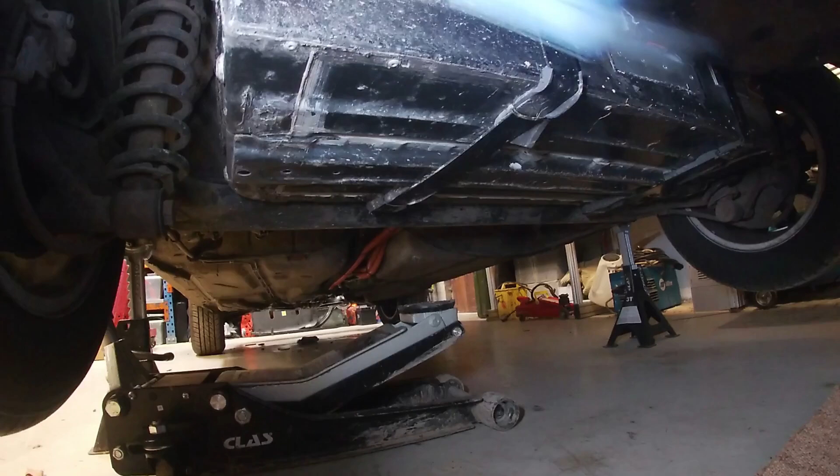Underneath, for those who didn't know, there's the pack that we had in here. This is the rear of the Nissan Leaf pack, which I chopped and utilized what was left. We sealed it all up and it's been great. It's a good sealed pack. But it's no longer fit for purpose for what we need to do. So we're gonna design a new pack which is gonna fit in the same space. And yeah, see how it works.

So hopefully I've designed it in CAD that we're going to use those 355 modules, those VDA 355s, and they're going to be sitting, I think, obviously flat on the flat height, and I'm not sure. This is where I really have to be careful space-wise what I have to play with, because I really can't go down any lower.

That's pretty much it. You see, there's the trailing arm there, and that bar sits just around it there. You don't want to go any lower than that, so that's my limit. So this rear pack's going to come out, and yep, let's go for it.

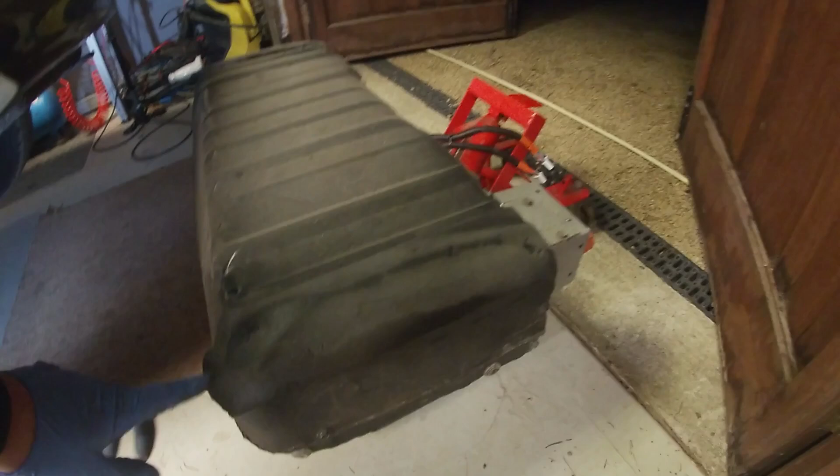So there you go. One pack out. Yep, it's lived very happily in there for the last couple of years. Could have done with slightly denser foam there, but it's fine.

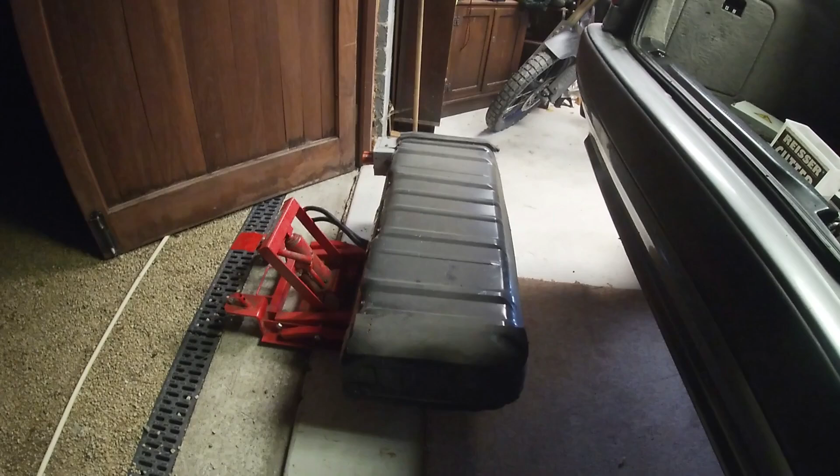But what we're going to do is take the overall rough measurements of this, and see how this stacks up with our next plan. Will the modules that we want fit into the same volumetric space? I need 10 to fit in here. That might be a little bit of a challenge, but that's what we're here for, these little challenges. So that's it.

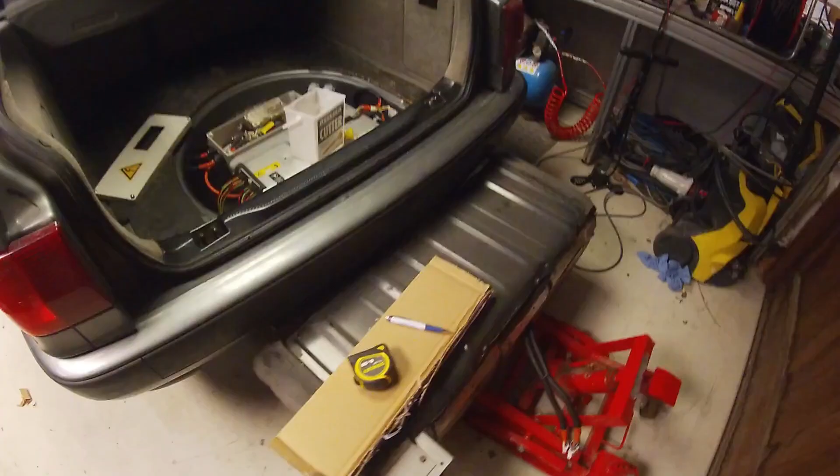Measurements taken, scribbles made. You know, we could go 21st century on this and 3D scan it. Stay tuned, might do that. But for now I'm going all prehistoric on it, and I'm going to sketch, well, it's part prehistoric. So I've got the rough sketches of it done in CAD. And then with this, let's just see what size the box needs to be.

So we'll see. In the meantime, the coupler's being made down the road. Well, the coupler at the other end is being adapted to fit, so we should have a bit more of that. And then slowly piecing things together. Battery's the big thing. First of all, make sure we get the right ones, they're all going to fit. We'll go from there. So let's move things along.

A few weeks later now, 3 weeks later. Been very busy. Place is cleaned up a bit. I'm kind of packing. Other side of my life. So, what have I done in 3 weeks? Not a lot. Been waiting for a piece of the puzzle to be finished.

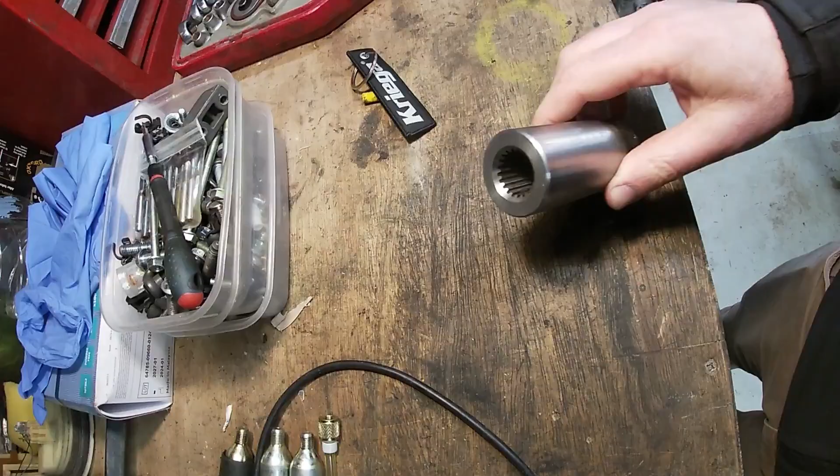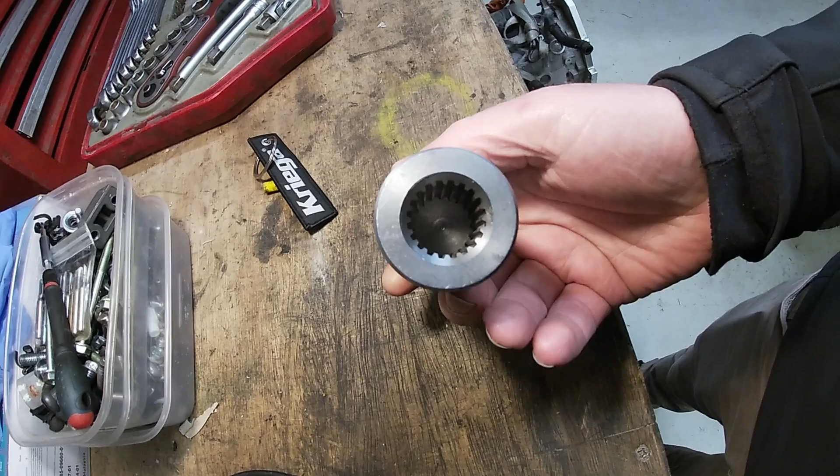And voila. We had that. That is our Leaf side. And now we have our Audi side. Lovely. Pretty. So we've got a spud in the middle of it there to stop it wandering back and forth. That's what it was doing before. It was going, woo, where are we going? Let's offer it up and see how it looks. It's good. Beautiful. Just enough engagement there.

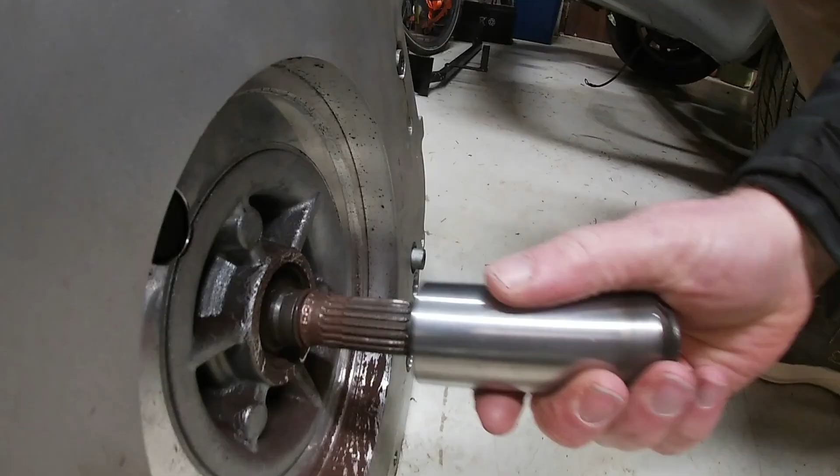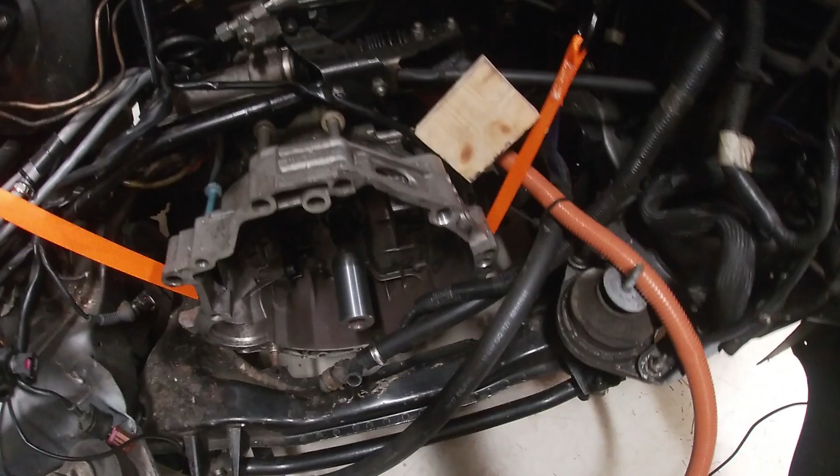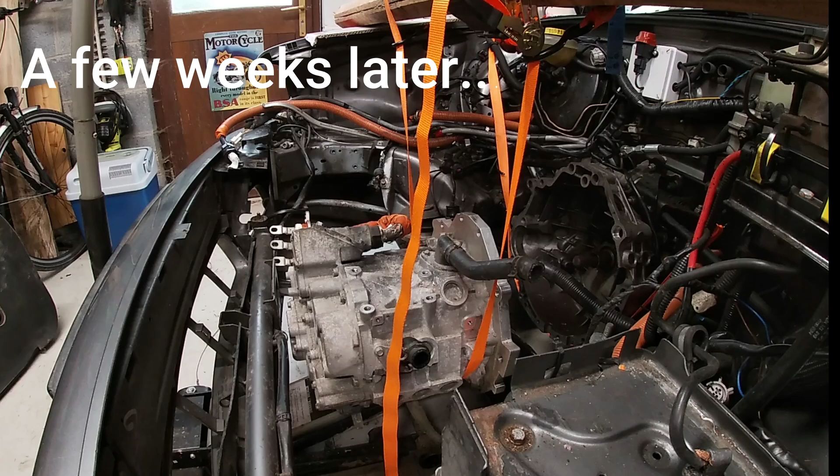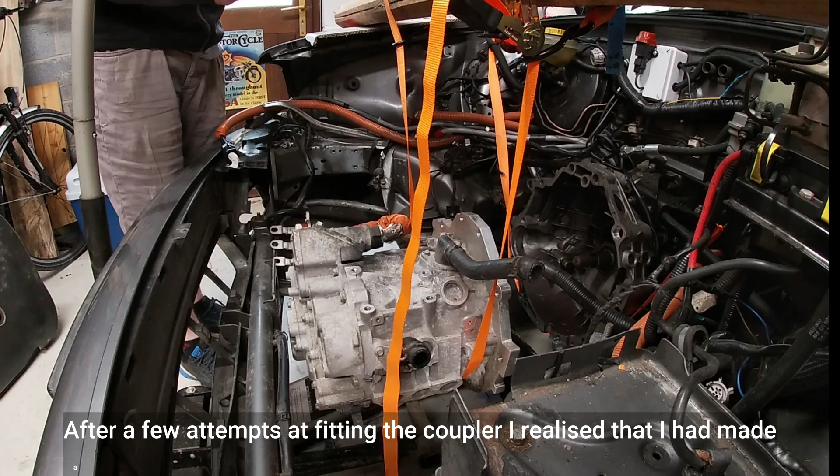Huh? On this side. There. So what I'm going to do is a bit of measurement to see how that matches up with that. Make sure everything's happy. Okay. Little coupler. What's going to be easier? I reckon probably putting it on the other side.

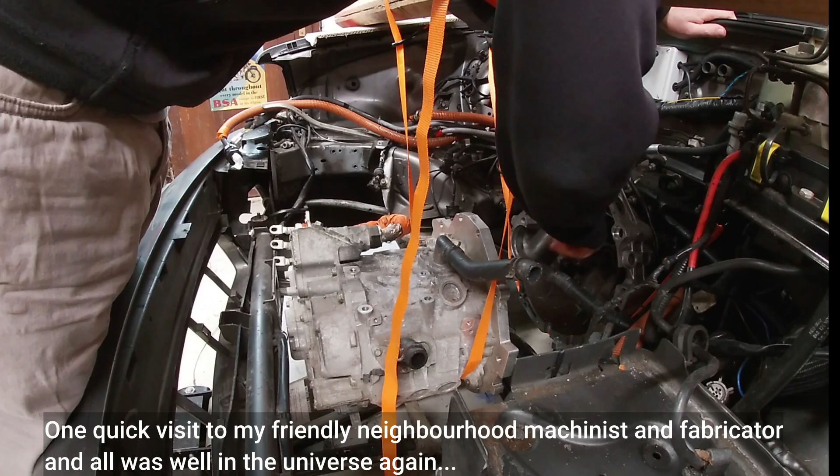There you go. Little bit of a tap. Rubber mallet. Lovely. Like a glove. See? Let's jack her up.

Okay, we're just lining up to the shaft now. See, we're just getting lined up now. So that's it in place. Now, what I think is, oh, go away, B. Oh yeah, it's just almost there.

What we might have is like a slight mismatch where they just might not be matching up, but it's going to be a little bit of either metal off either end, basically gearbox, spline end, or the motor side. So this is it. It was a first test fit to see how it works. A little bit, probably about 10 mil somewhere, just needs to be relieved. So we'll do that in a bit.

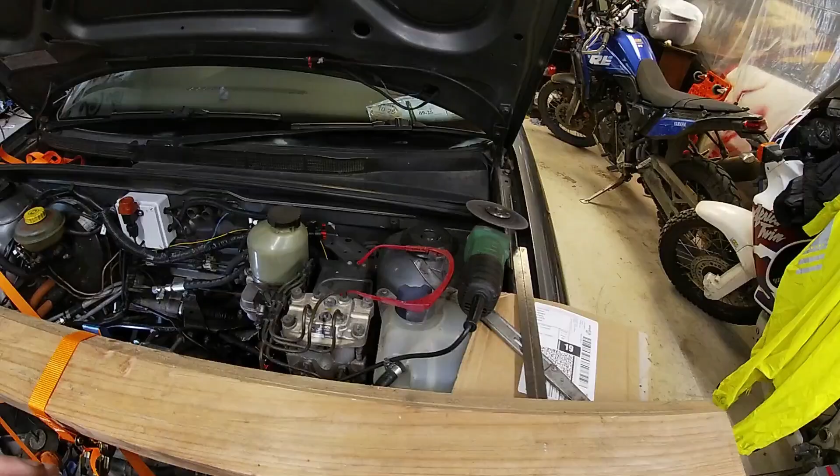Okay, a little bit of a snip with this off the end of the gearbox. Input, output, input shafts. These now, it is absolutely perfect position. Mate up with this. Oh yeah, there's a little bit of it left.

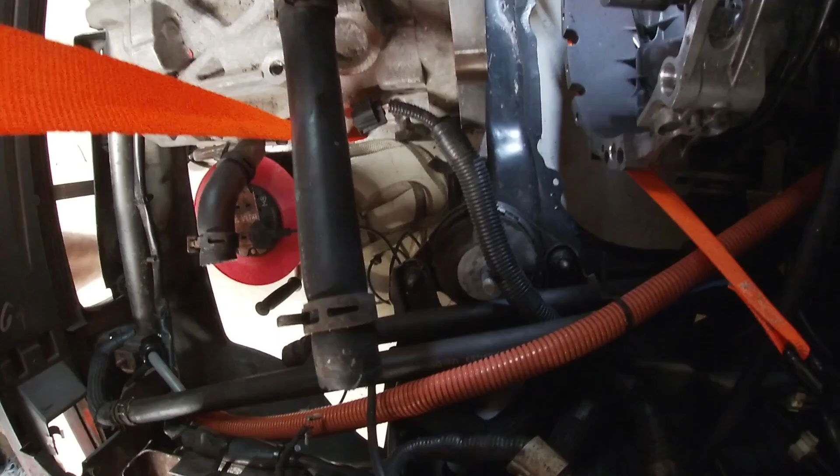How you do this? Come on, come. I don't want you staying there. Hello. Bye bye. Out you go.

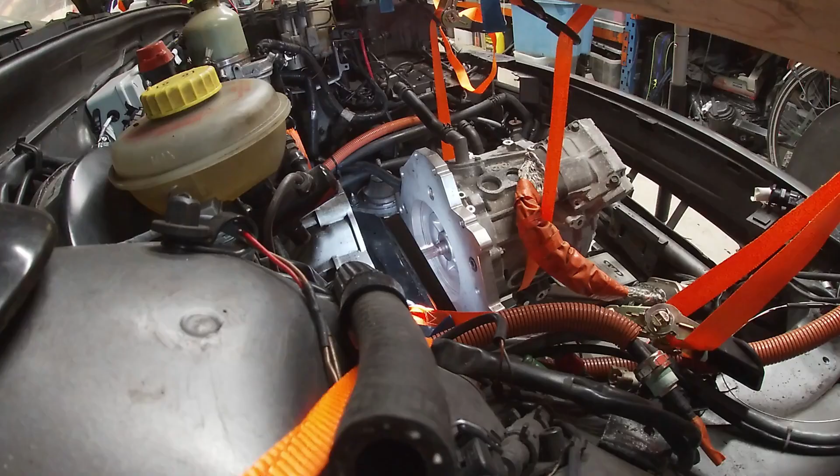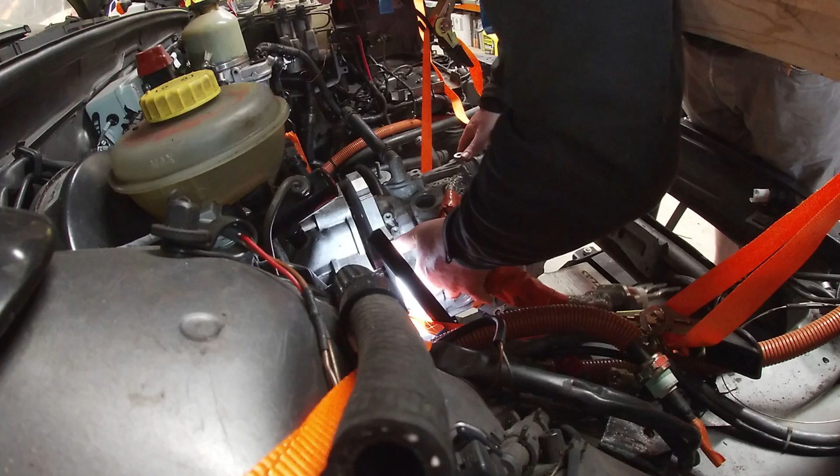So, grinding gear. Let's put them together again and see what happens. Take two. Take the strain. So, should go together a bit easier this time, I would think. Okay, that's that. Look at that.

Yeah, so I think all it was, there's a dowel that's on the gearbox housing, and it just wasn't aligned with the adapter plate. So took it out, put it back in, snug. Did a test measurement as well, and I've got 2 to 3 mil play on the coupler. It's perfect. So I can just sit there between the two, and it'll all be rosy.

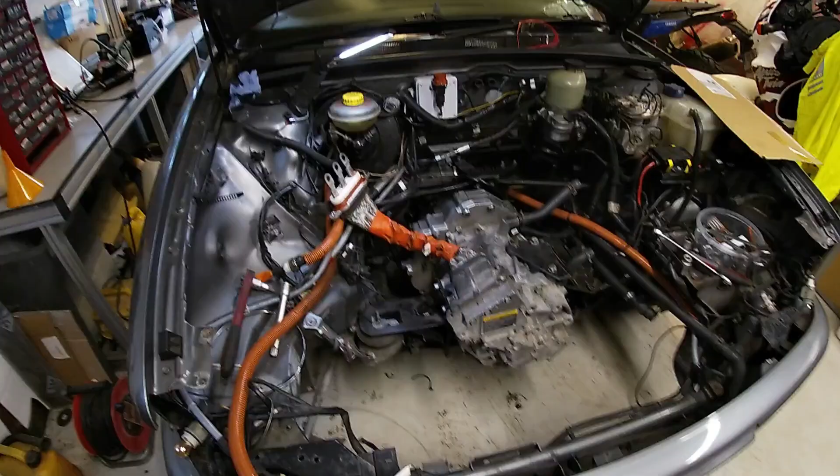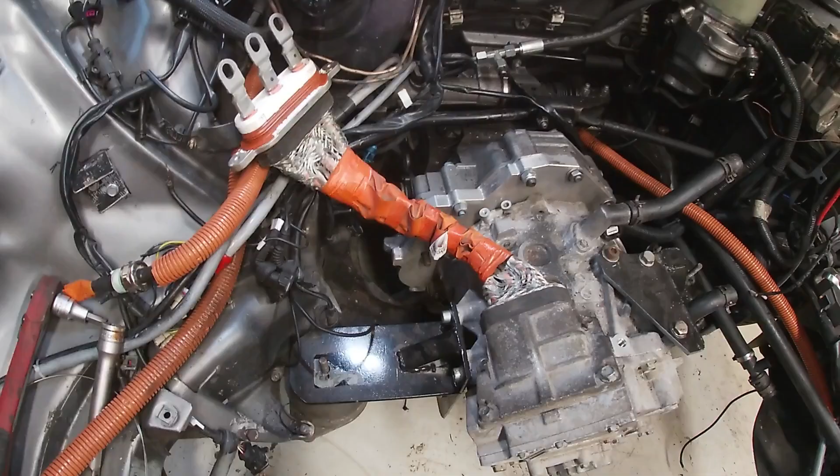So I'm going to get this buttoned up and get some motor mounts on, and yeah, we'll be good. Okay, that's it. Bosh. Motor mounts in. I just need to do a couple more bolts around the bottom, but it's all snug. Next up is to plonk the inverter there-ish, but basically when I get that box and see if it fits. But that's for another day.

Enough messing for today. Let's leave it at that and pick it up at the next one, where I might have some 3D modeling of what I think is going to fit in the box. So yeah, more on that next time.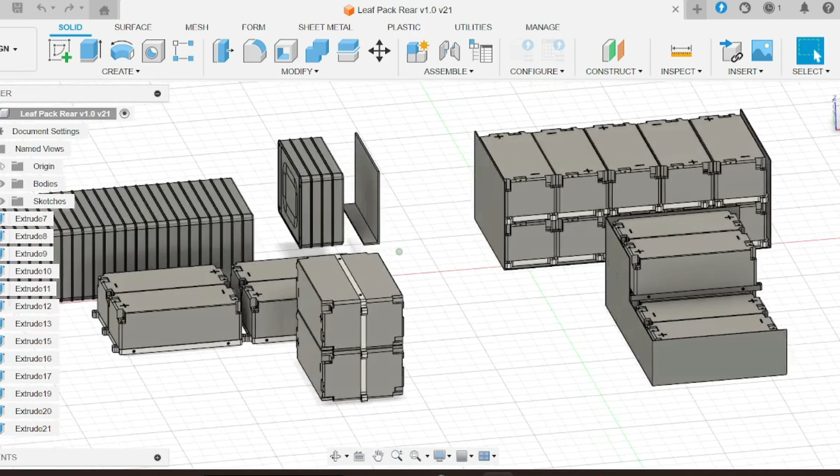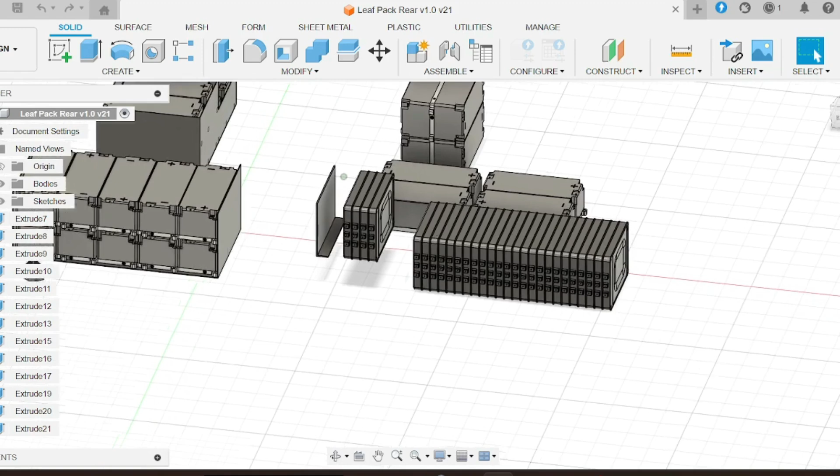So this is me messing around with what I can in Fusion 360. Actually, let's zoom out. So you see over there, that's the full Leaf pack, laid out as it would be in the back of the Leaf, where I have the fuel tank. So they are, oh, come on, there you go. Yeah, they're all laid out. That's 24 to 48 laid out. So it's kind of like, right, there's my envelope, the space I'm going to need to fill.

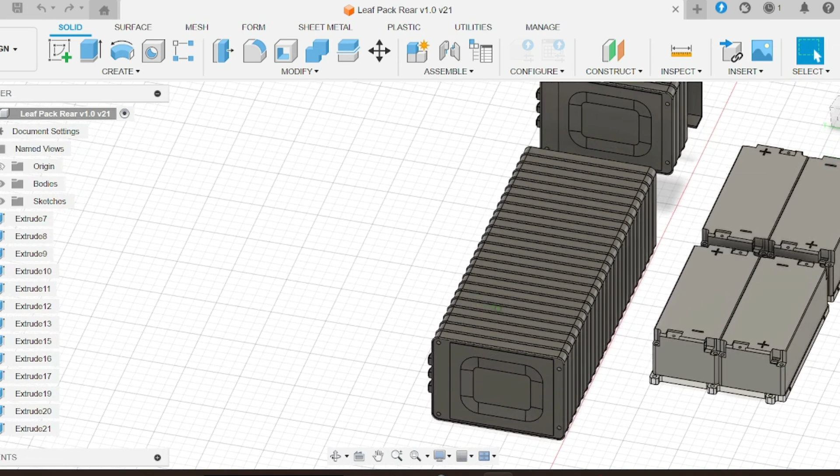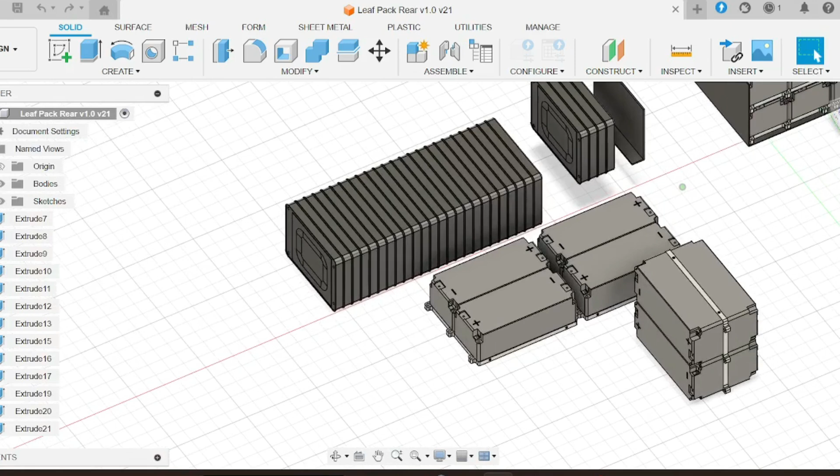So I looked at these VDA 355s. These are the ones that are used more in the likes of the Peugeot e-208 and any of the Stellantis kind of stuff. All of these come with their own cooling plates, and all the CAD is readily available. You can actually get all these from the pack as well. The packs out of the e-208 are pretty reasonably priced at the moment, and you can get a lot of the hardware that you need, and chop and change.

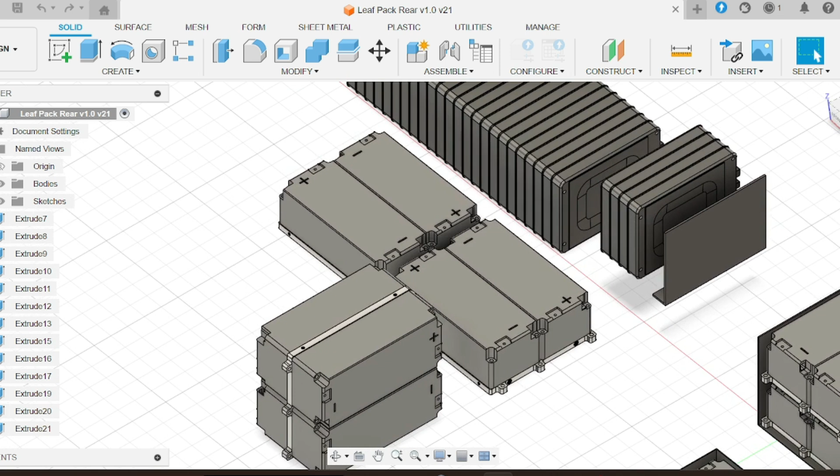So I'd been messing around with lots of ideas of how to package these up, how they're going to fit in the back, especially first of all the petrol tank area. So using 6S2P modules, magic number 18. That'll give us our 400 volt nominal voltage that we need. So with that, started playing around.

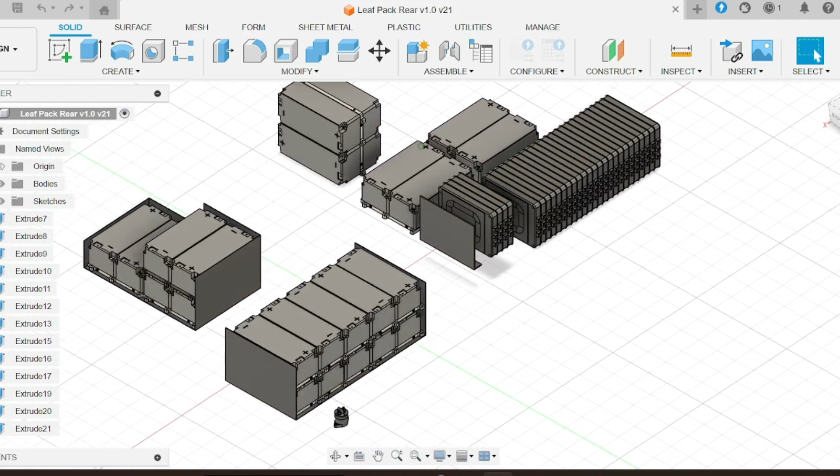And if you look here, I took some measurements underneath the vehicle where the petrol tank sits. Sorry, I'm getting used to the SpaceMouse. There we go. This is the arrangement I've kind of come to. You got 2, 4, 6, 8, 10 there.

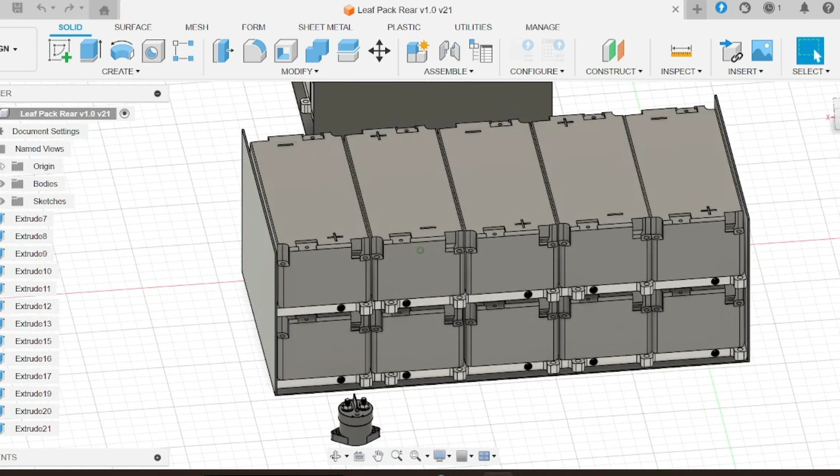And if you can imagine this, I'm looking at the back of the vehicle at the moment. So you're looking at the pack as it sits in the fuel tank area, and around this area here, back here is where the spare wheel well would be.

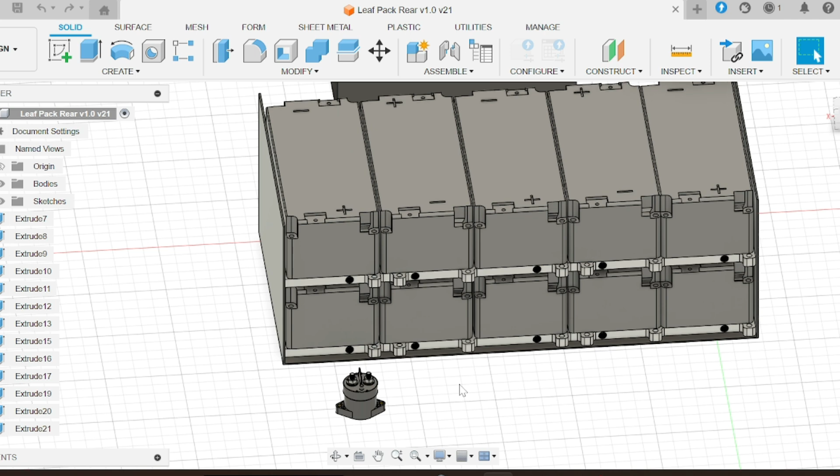And so with the spare wheel well being circular, it leaves a lot of space back on these edges at back here. So on the pack I have inside, I have the HV connector over this side feeding back into that small little high voltage junction box in the boot. But with this, I'm going to be able to extend the pack out and around these corners, these two corners, and put in the contactors, whatever I need back there to isolate these packs, and whatever else I need to put in there, any BMS hardware and stuff.

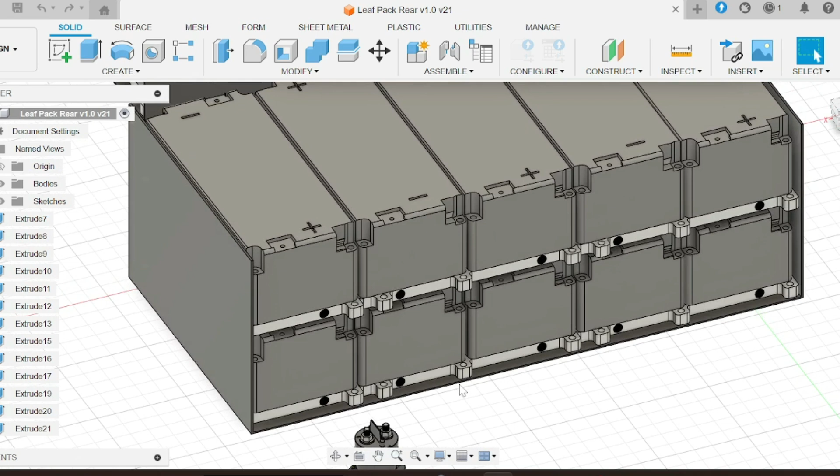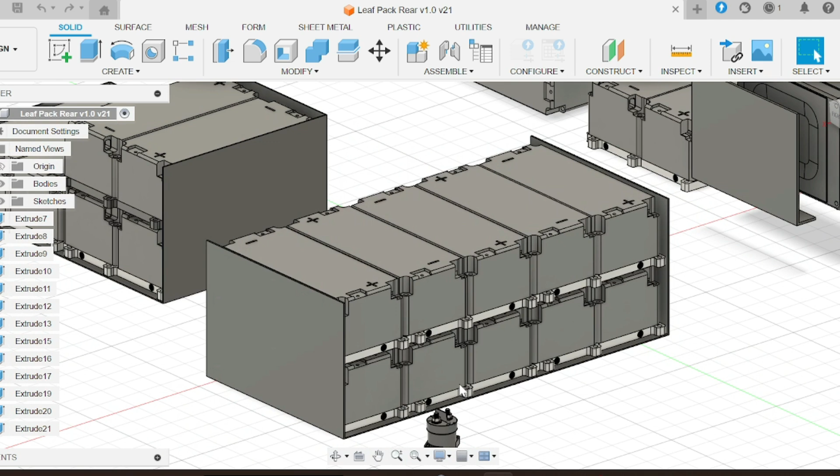So this is just a start to see what I can put in here. So that is that, again, a bit rudimentary, but it's straightforward and it fits with plenty of room. When I say plenty of room, like 30-40 mil here and there, it just about has the headroom. The last pack sat just above the trailing arm of the vehicle. This does the same. So yeah, that's all good.

But if we carry on down here, the big thing is how are we going to fit the batteries at the front? So, come on, Space Mouse. Oh, this is so funny. Come on, you want to go left or right?

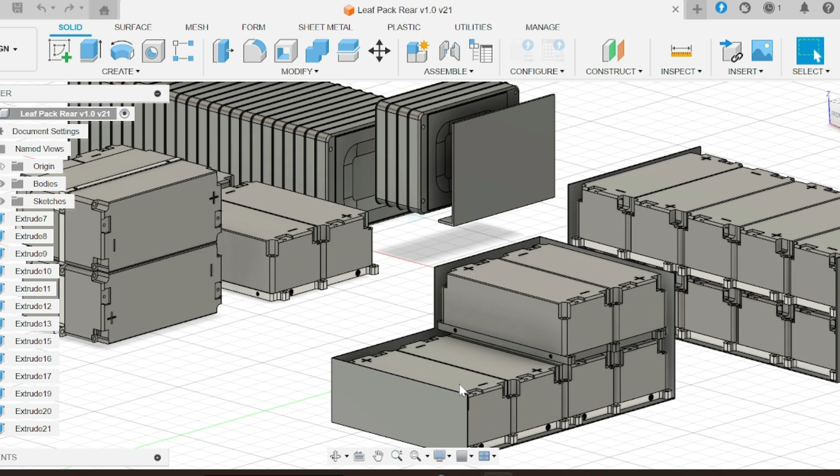There we go. So after I played around with so many configurations, this is what I kind of ended up with. And yes, 10 plus 6 does not equal 18. So I've just gone for the 6 here for now, just as a big block to see where I can put it into the vehicle for the moment and see what other space I can squeeze in another 2 modules into.

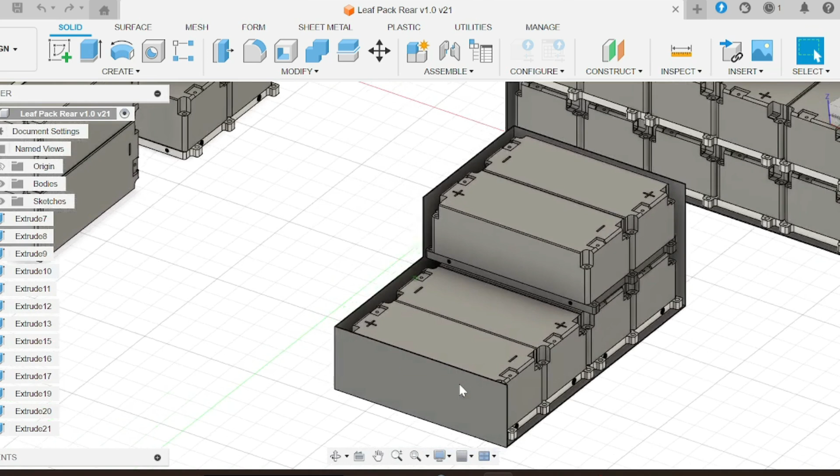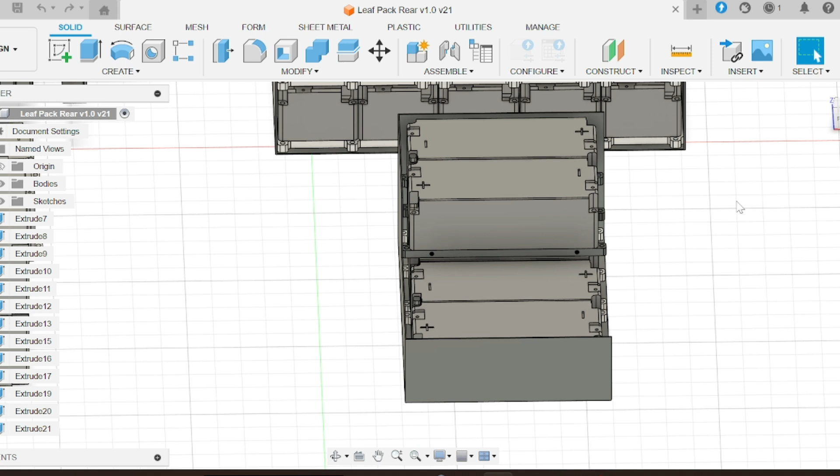So again, this is looking at the front of the vehicle. Radiator up here and turrets are over here and over here. And then the idea is to put the inverter over this side, because the guts of the brakes are over here and the power steering pump is over here. So eventually the plan is to get some 3D scans of everything in the engine bay and then plonk it all together and see how wonderful it looks. But for now, that's the thing I'm looking at.

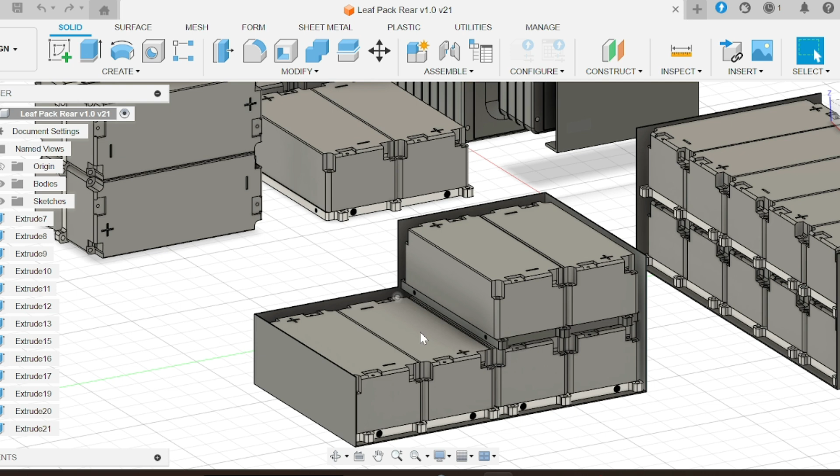And with that as well, before I forget, the high voltage junction box basically gets bolted up in here, and this has a slant, sort of a tilt coming down there, so everything can comfortably be sitting in there. So it'll be sitting at the front. So let's zoom out again. There we go. So that's what I've been playing at, in very loose terms, but let's go have a look in real life.

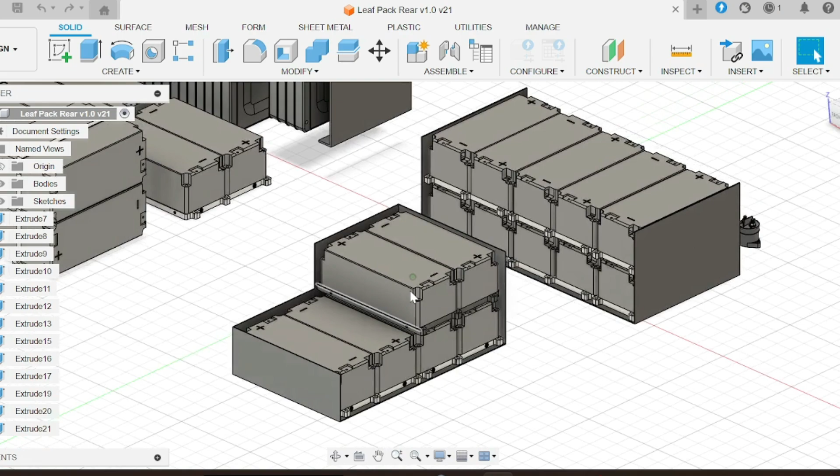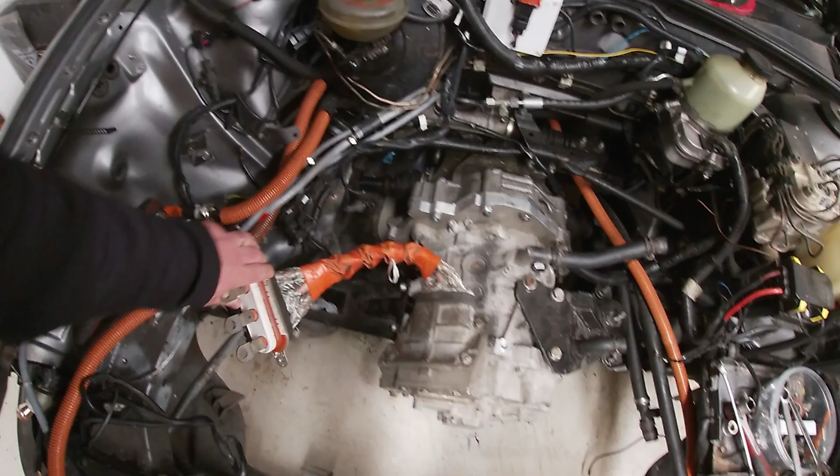Ooh. And we're back in the room. So, as you saw, everything's in place. That comes over there somewhere. Plan to put the inverter over here somehow. Don't know yet, we'll figure that out. Main thing is we want to see how we're going to put the batteries up front. I've no idea how this is going to fit in here, so bear with me. We're going to plonk a big lump of cardboard in here, which is the rough space of what you saw I was doing earlier on, and see how it fits.

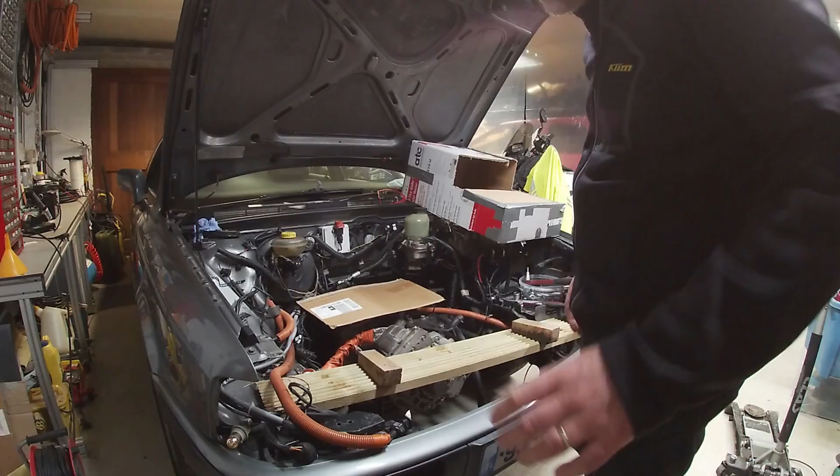Now that I look at it all, I'm not hopeful, but this is almost as rudimentary as you can get. Timber, decking timber, cardboard, and to make sure that the box can pass over this fella. So this is moving as far away from the CAD you just saw as possible. The exercise here is to see if all this can sit in here when the bonnet comes down.

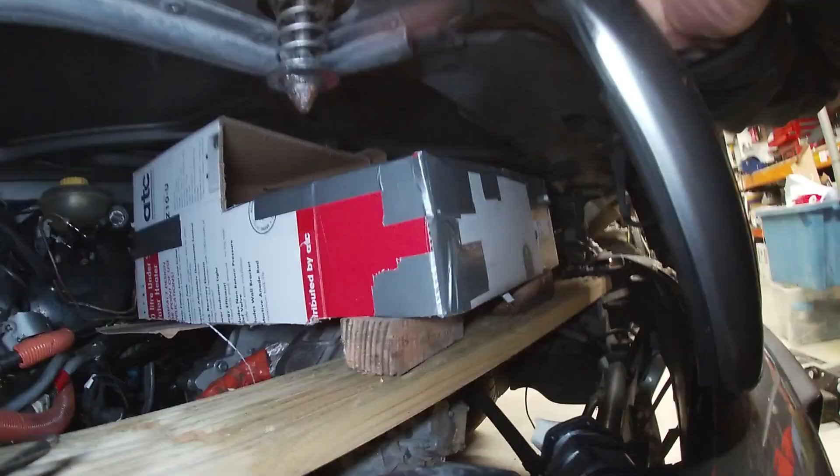Like it matters. My God, it's dead level. Do you believe it? And look, it's almost perfectly level front to rear, so it must be right. It must be absolutely perfect. So, let's lower the hood, see what happens. Drum roll, please. I'm going to see this at the same time you are. Let's see. Okay.

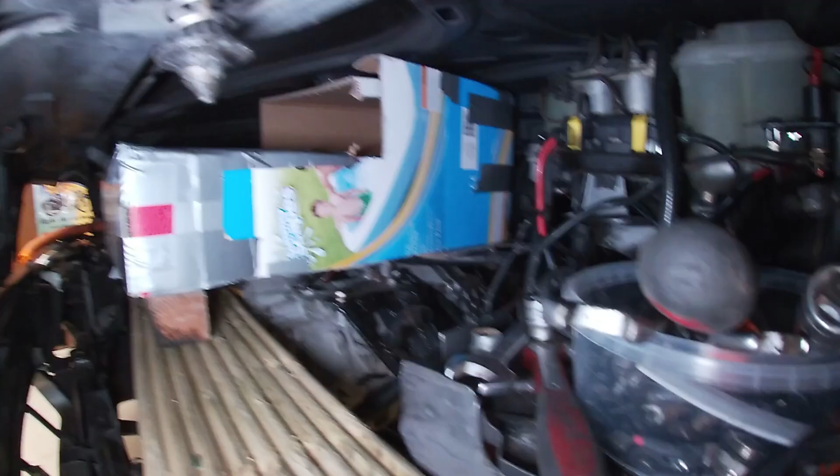Not amazing? Actually, it is amazing. I don't know if you can see it. See the way the cardboard has come down there. It's actually a good fit. Even the kid agrees.

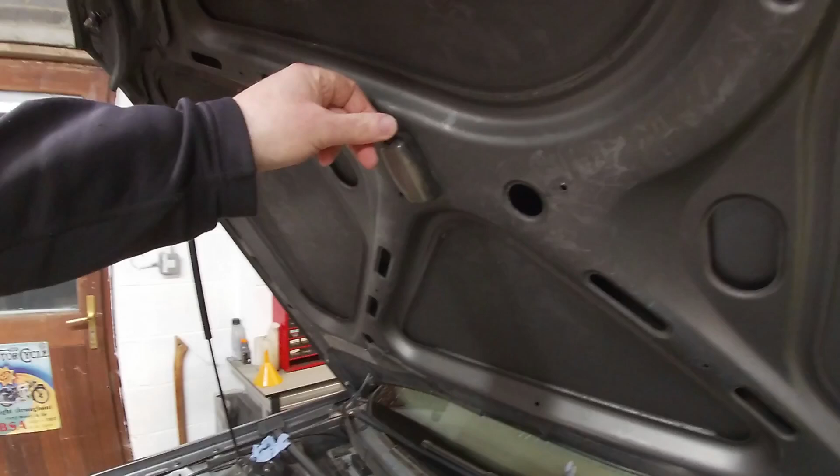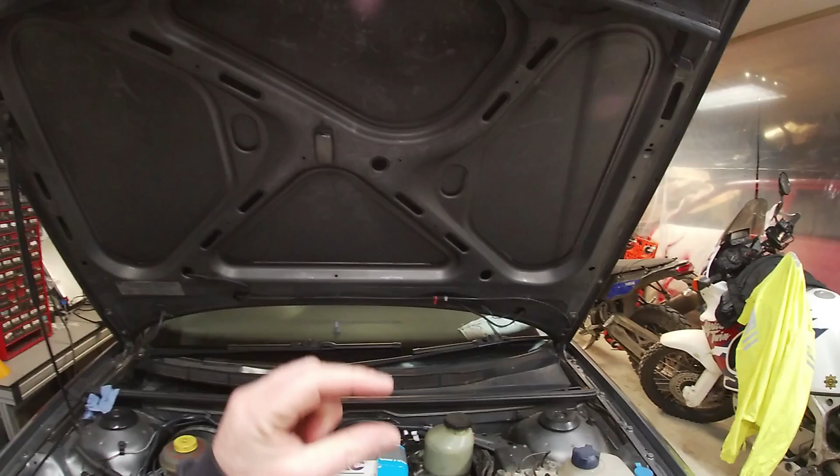So the one thing that's interfering with everything is that, which I'm pretty sure about a year after any of these cars were fitted with these lights, I think they kind of failed. They stopped working, so that is the only thing that's in the way. That's just pressing down here. But the rest of this is clear by yay much, 20-30 mil, which is pretty good.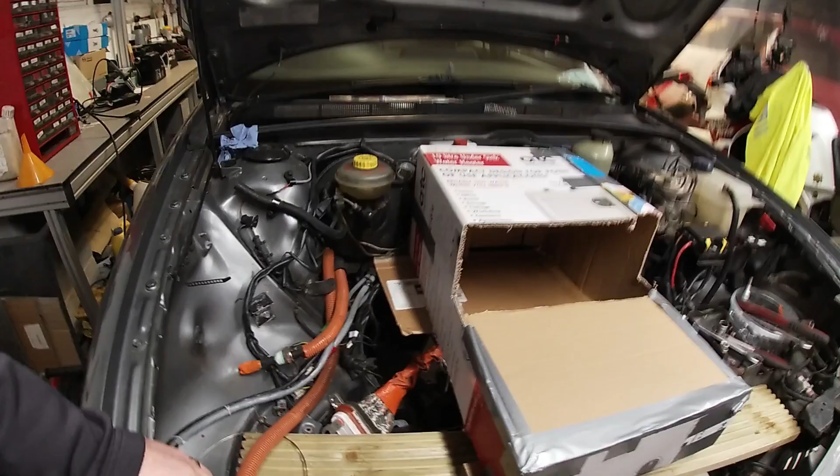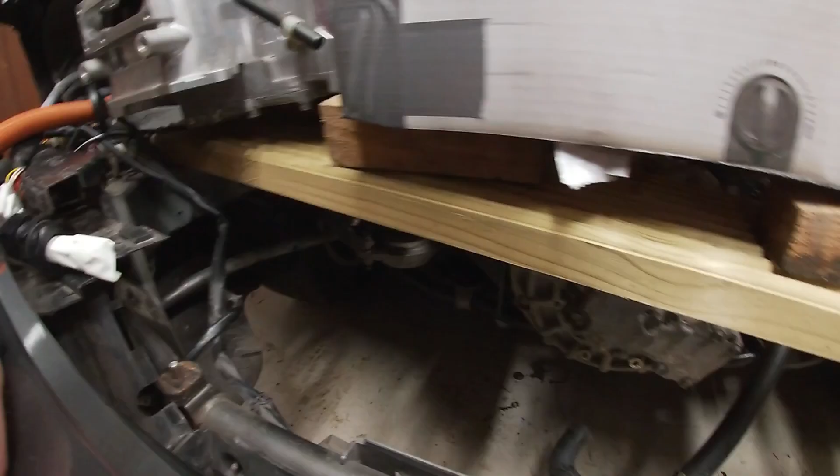With that though, you say, where's the inverter gonna go? So yeah, I'm gonna get to that now. Hang on a sec. Current thinking is it goes there. Current thinking knows that there's a big headlight there as well, so current thinking may change. Current thinking also thinks that it might go down there. We do a lot of current thinking. So yeah, that is it.

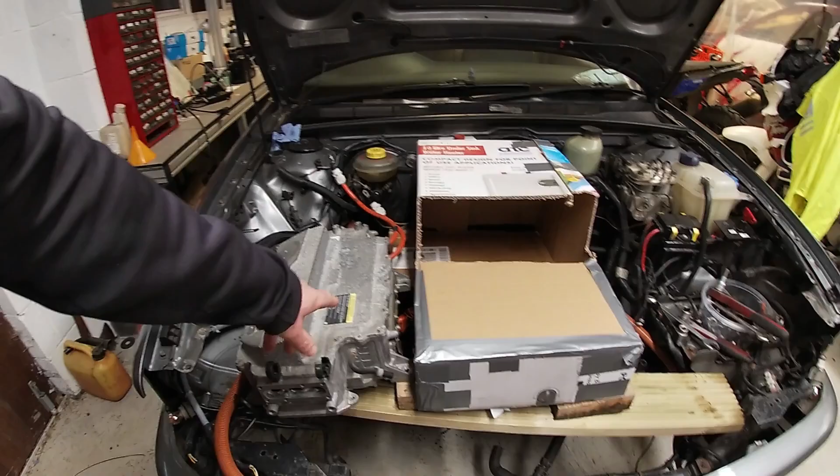So I mean, phase cables are coming in here, so it would mean replacing the phase cables, making them longer to get them in here. Not ideal because you'd like to be able to keep the original connections. If we flipped it, that would be better. Phase cables are going to connect in, but then you'd have your high voltage stuff sticking out this way, and they need to come around, get back into the battery. Not a huge thing.

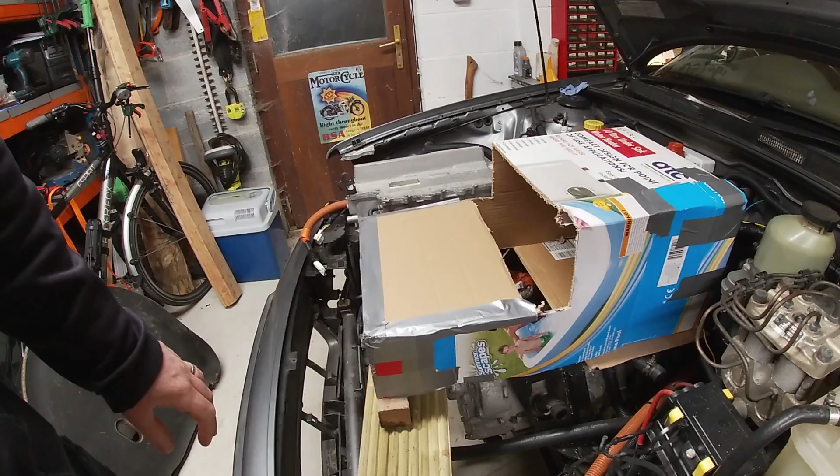Other ideas are, because this is going to be up here, I'll have to do a few measurements, but it actually might be able to sit underneath. Not forgetting my conundrum of the extra modules that I need to squeeze in here. And again, where do we put those? If you take that, put it underneath, then you may be able to, I'll have to do a bit of reworking of this pack, and have, actually, where's my, there we go.

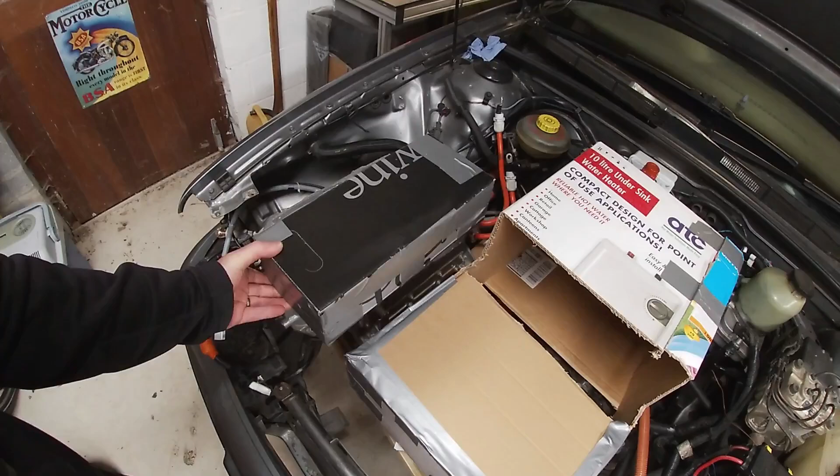This is VDA 355. Look, a wine box. So again, you could go, right, can we put it there and over there? So the two extras kind of saddle that way, because at the moment the box is designed so they sit this way. So leave that with me. I'll do some more cardboard box antics. What do you think?

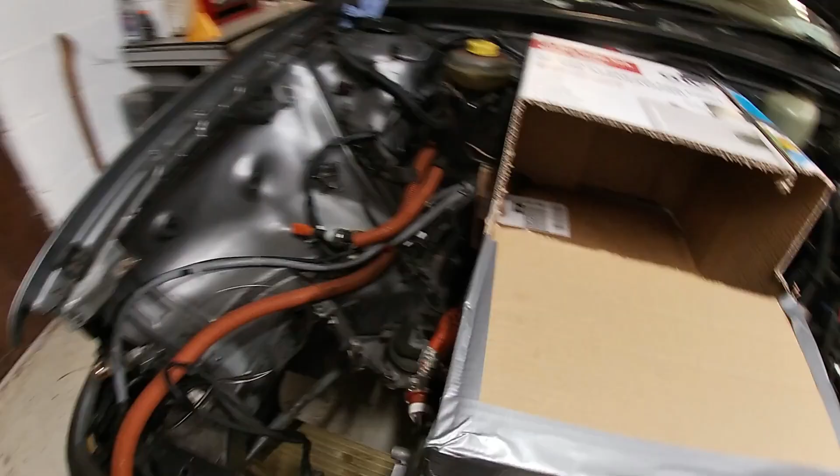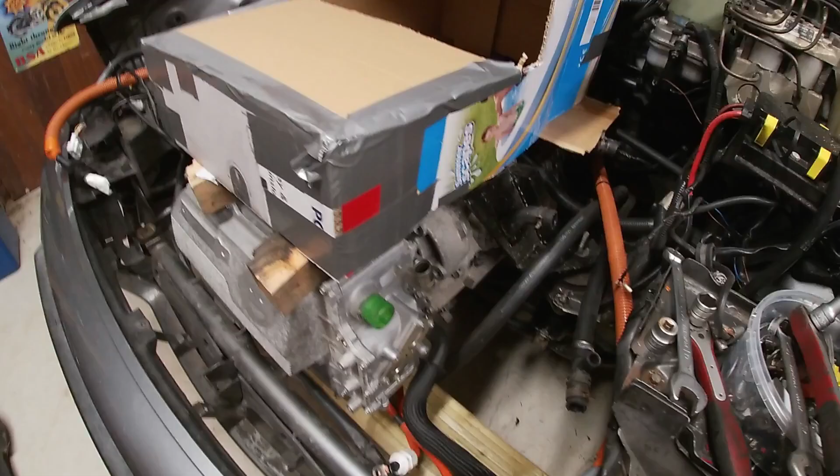Okay. Amazing idea number 47. We put it on its ear. Look. See? Phase cables go right in there. It's on its side. I don't know if IGBTs like to work on their side or not, but, well, ChatGPT's never lied to me. So the DC feed kind of goes in there, but there's enough room for it to come up and it could enter in below the battery.

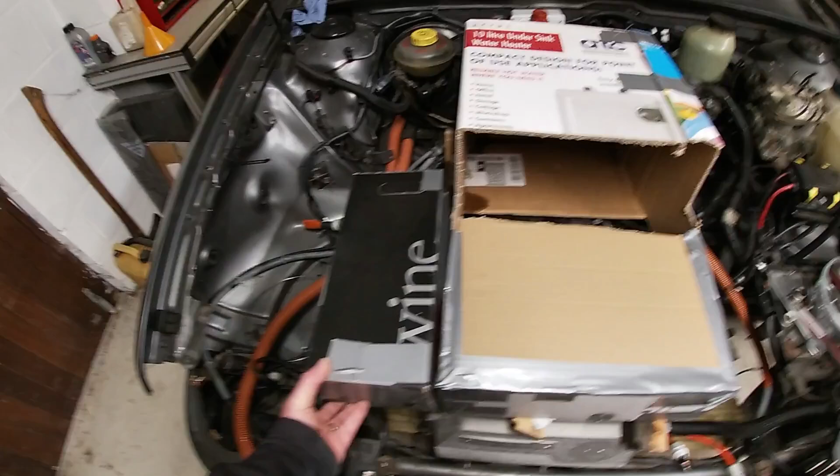So that leaves lots of room for an extra redesign to have the pack sticking out a bit, and still leaves enough room for other bits and bobs. Still enough room for radiator and everything. So yeah, yoink, yoink. 18, 8 up front, 10 down the back.

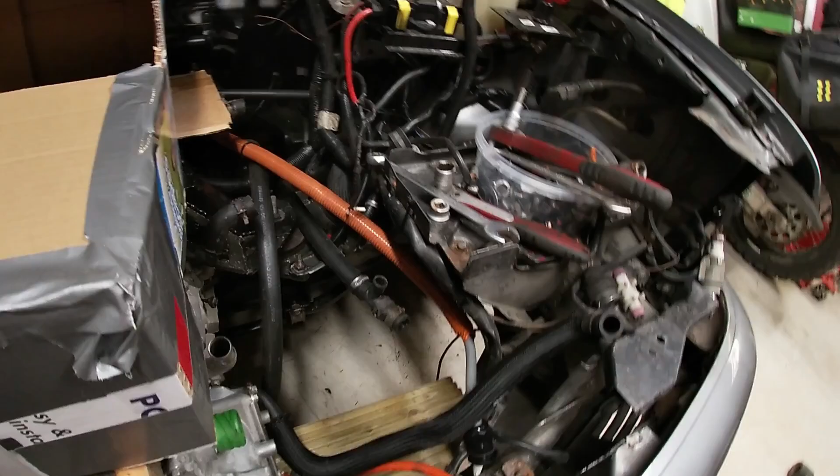So yeah, what do you think? Is that the way to go? I have no idea. I'm just going wherever the flow takes me, and that seems to work because it uses up loads of wasted space down there. And look at all that space down there. You could easily put the charger down there as well.

Gonna leave it there. This is gonna take a little longer than I thought, so a lot of playing around. And if anyone has any bright ideas, and just tell me, no, you should not do that, it would probably be safer putting it on its head, then let me know. But for now, that's one thing I'm thinking of looking at.

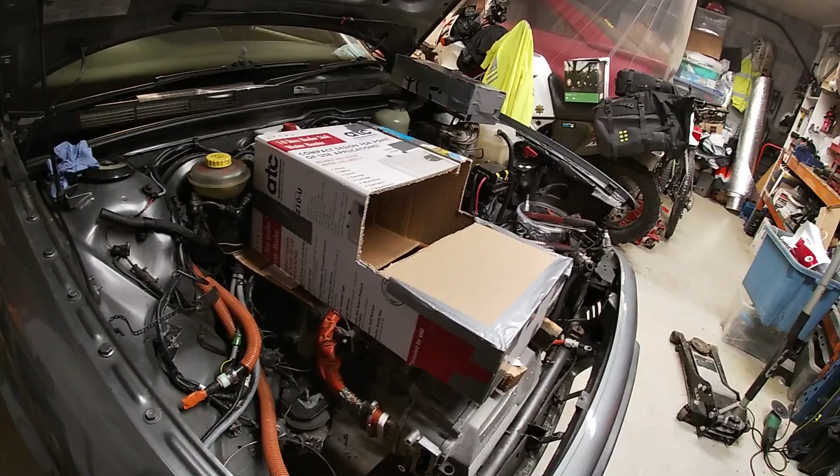I mean, the coolant's going to be gravity fed, pressurized. I can't remember which is the flow or return, but one's there, one's top, so you can feed it in from the top and it flows out the bottom. So it's working like a radiator. In through the top, out through the bottom, or in through the bottom, out through the top, whichever way.

Actually, that goes over there, and then the feed. Oh yeah, so there's the flow or return for the motor, and the other one's out there. That's working out really well, isn't it? Pump down here, all very tidy. It's writing itself. Okay, let's leave it at that. Bored you enough to tears.